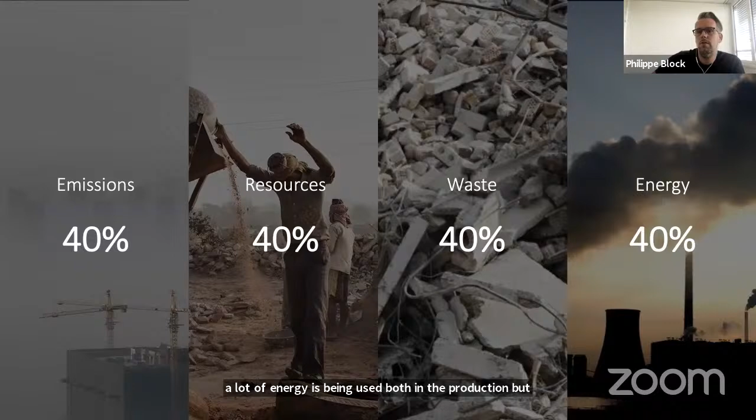Apologies if this is known to you and if I'm repeating myself, but if we were to build like we build today, in order to provide an average quality of living to the 20% more people expected on this planet in the next 20-30 years, this is what it translates to. The challenge ahead is we need to build the equivalent of one New York City every month for the next 40 years.

So we shouldn't do this as we do it now, because these gigantic global numbers still persist.

This framing was very similar in other lectures, but I want to emphasize that these are indeed the two aspects that I believe we need to fundamentally disrupt and find other solutions for. We need to design, we need to build differently.

As a half architect, half structural engineer, I would call myself a structural designer or an architectural designer—an architectural engineer, that is. I will be focusing mainly on the embodied emissions, so the ones related to production of materials, construction, and so on, and less on the operational energy.

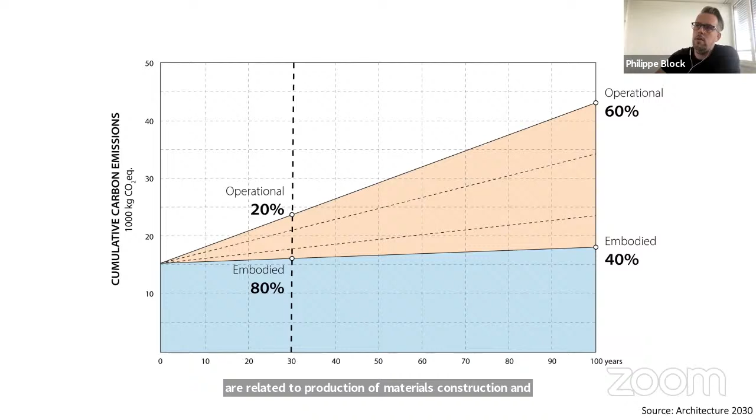But just a quick statement there. Theoretically, the world would have a very straightforward solution to reduce the operational energy and emissions very directly, by actually switching to renewable, greener sources of energy. But we don't have as straightforward a solution to the problematic embodied emissions.

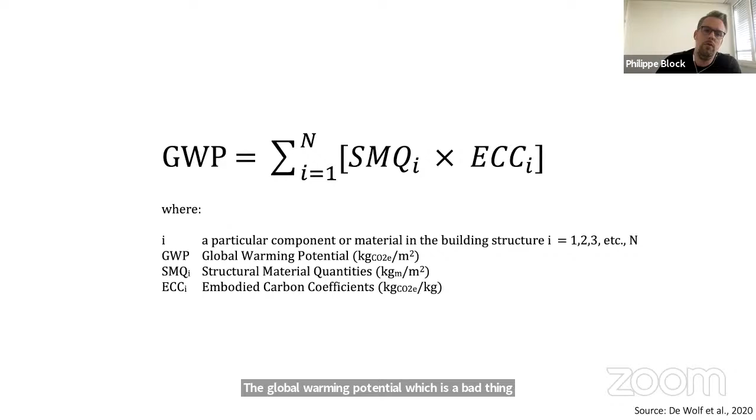I like to adopt or borrow this equation by Catherine De Wolf, which she developed for her PhD with John Ochsendorf at MIT, where she really reduces the complexity to what really matters: the global warming potential, which is a bad thing. It's basically the amount of pollution associated with a building or construction, which can be expressed as the sum of all the parts of this building.

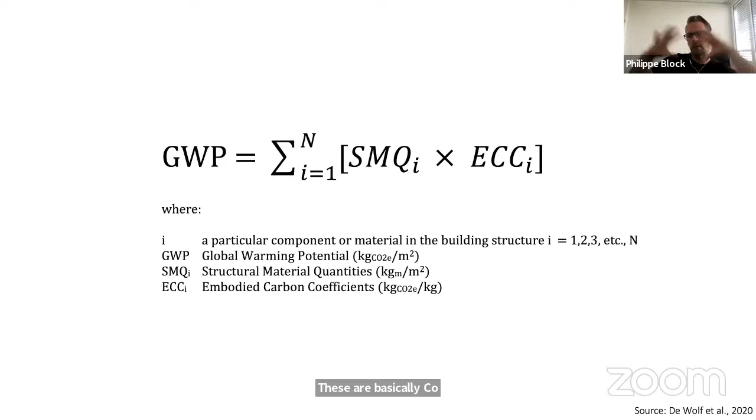And then there are two things that are important. What she calls the structural material quantities—basically the volume of material that one uses. And then the second is the ECC, the embodied carbon coefficient. These are basically coefficients that describe or capture the pollution associated with a material.

So you see in this equation that our target should be very simple. You can either make a structure very light, significantly reducing the volume, or you can use very low impact, low pollution materials. Ideally, of course, you achieve both.

An important point to make here is that in engineering history over the last decades, engineers have mainly focused on 'lighter is always better.' But this is not necessarily true, because if you make something lighter but in exchange use a highly polluting material—one with a high embodied carbon coefficient, like carbon fiber—you might be offsetting many of the benefits you're trying to achieve by going lighter.

So what I will show in this lecture is strength through geometry. I will also explicitly talk about material effectiveness—it's not just about efficiency in the traditional sense of using less material or being lighter, but more about how you use material. This is key.

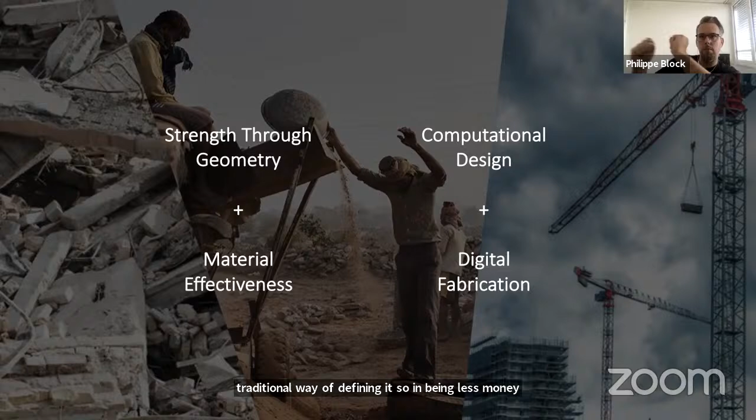And then, of course, as I already said at the beginning, we use computation both for design and fabrication to try to design and build differently.

Right now we're about 12 years into our adventure. I started my chair in August 2009, and we've tried not to remain just theoretical or stick to the design side, but also question how we build things. Increasingly, we're translating these ideas into real projects, which is a totally different kind of challenge, and I'll give some insights on this later.

Let's first look at computational fabrication. I purposely don't call it digital fabrication, because everything is digital—even a simple CNC mill is digital. I call it computational, meaning we don't just do things digitally, but in the design process we already encode fabrication logics, principles, and opportunities, but also limitations, so that you can really capitalize on those advantages.

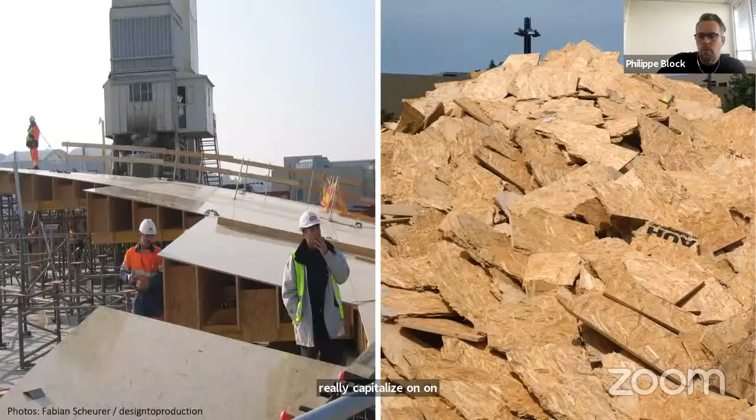An important strand of research for us in recent years has been addressing the shaping of structural geometries—these shells, which are non-standard geometries—and trying to address the huge waste, cost, and logistical challenges associated with realizing such structural geometry.

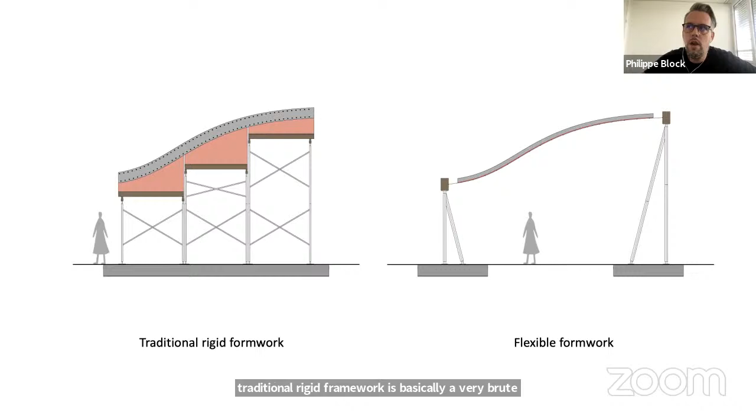In a way, what you see on the left, the traditional rigid formwork, is basically a very brute force approach. While if you introduce flexible formworks, you can go very light, but that also means, relating to my comment about computational fabrication, that you need to take the restraints, the equilibrium, and the structural logic of these flexible formworks into your design framework.

So a prototype of these kind of ideas we built, I don't remember, in 2017, 2018. Sorry that I'm blanking on this now for the moment. But this is, of course, the work of Mariana Popescu.

Here you see basically that if you get the geometry of your formwork right, so if you actually use structural geometry for your formwork itself, you can use literally something as simple as a stiffened sweater to build, for example, a concrete shell.

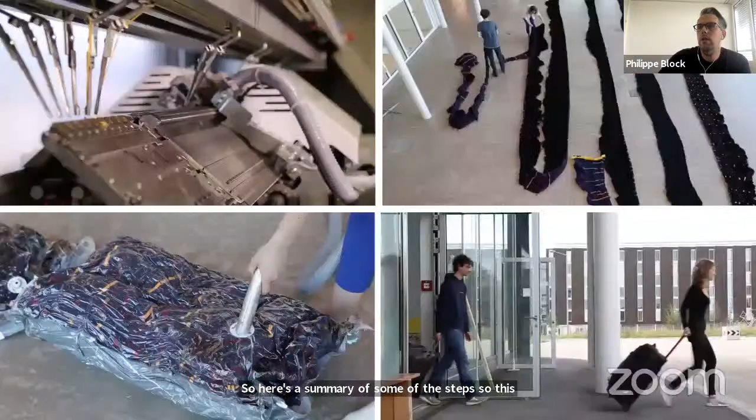So here a summary of some of the steps. This is using 3D knitting that is super lightweight, easily shipped in just 2 suitcases in this case. And then with these technical textiles, these 3D knits, you can also create all kinds of pockets and include other kinds of features and so on.

A key message here is that we develop these systems also thinking about what happens on site. So for example, this 2-layer fabric has all the clues, all the connectivities, all the slots, all the components included, in order to be able, even with workers we didn't meet before, to realize this complex geometry very smoothly and easily.

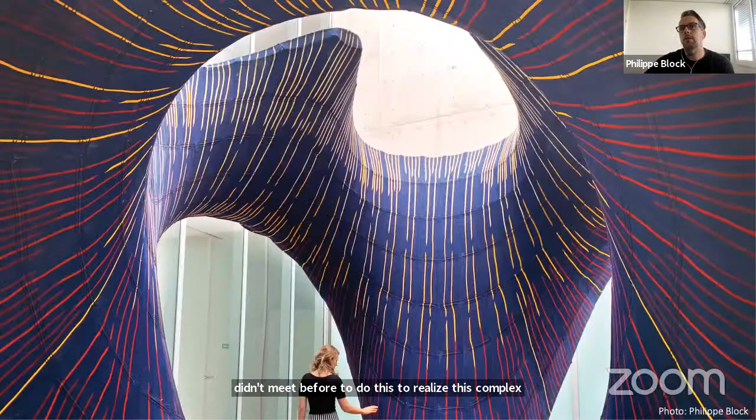In this specific project called Knit Candela, we also wanted to express another materiality. So the inside of the shell, the fabric formwork, was left in place to have this kind of unique aesthetic. But why we did this project was that behind this colorful interior layer, there was actually quite a sophisticated lightweight shell with stiffness in 2 directions.

A sophisticated shape that could be easily realized by this double layered knit where little balloons were inserted in order to create these pockets at the end of the structure.

Most important for me, though, is increasingly to always be very clear why we do demonstrators, what we want to achieve in our prototypes, and exactly also then to try to check with the actual numbers and statistics if we achieved what we were trying to set out.

So that is why this slide to me is maybe most important, to really double check if we achieved what we set out. What we tried to achieve here was to do this in a very tight schedule, only 3.5 months from first invitation to realization. Of course, in a Mexican context this is extremely slow, but nonetheless, I have the feeling that we achieved quite a bit, because this 3.5 months included design, many engineering iterations, and developing, prototyping the formwork system almost from scratch.

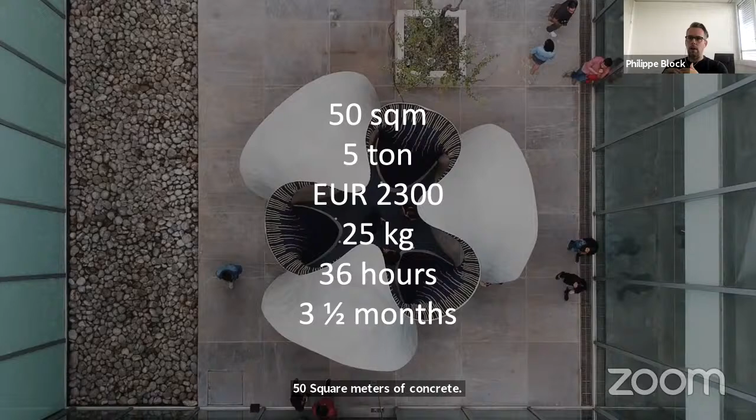So this is what we wanted to challenge ourselves with: can we indeed live up to the promise of having, for a sophisticated structure, a simple way of going on site and reducing the waste associated with these non-standard formworks. We're lucky that, and this is a project that has been going on for much longer, we can also translate these ideas not just into prototypes, but also into real buildings.

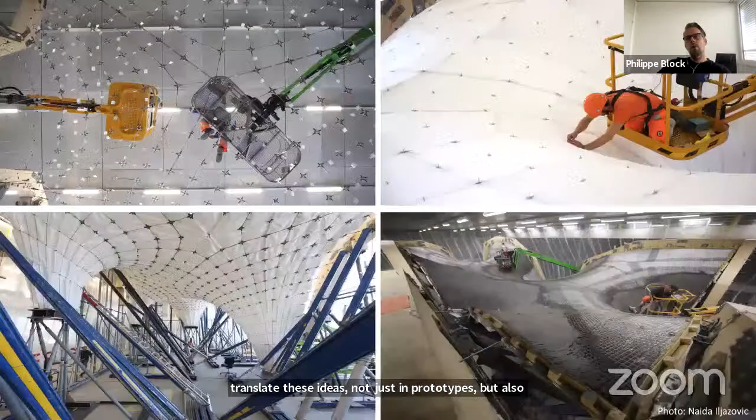This was still the prototype for this, where we indeed use a similar idea of a lightweight cable net formwork with a woven textile kind of draped over it.

In this case, what's perhaps interesting to point out is that the system we developed with these cable links could be entirely taken apart and reused. Indeed, 85% of all these components were reused in the final project, even though the shell received quite a lot of updates compared to this prototype.

This prototype in 2017 was extremely important in the sense that we learned a lot, but more importantly, every single step was done with the industry partners that would realize the real project. This was key because it allowed us to together figure out what the real bottlenecks were.

And also to build up confidence to translate such an extreme innovation, a tension flexible formwork, at quite a large scale. So what you're looking at here is roughly 20 meters by 10 meters by 7.5 meters in height.

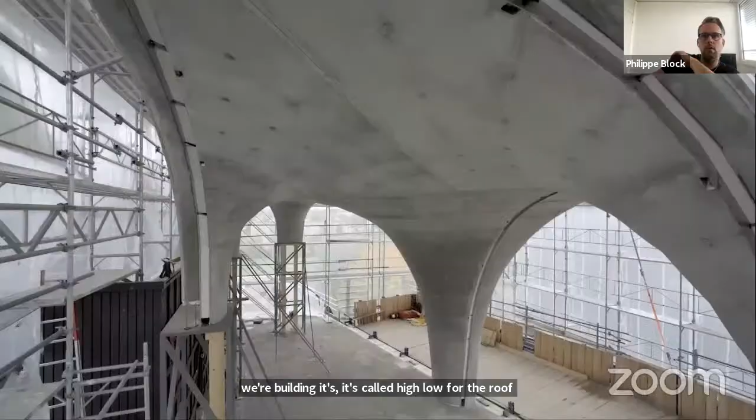So this is a large surface that is being built on this flexible formwork, for a unit on a building we're building called Hilo. For the roof, this now finally got built. So here you see a little video with some hints of the final double layer shell being built.

This was after decentering. So here you see a slightly reconfigured kind of formwork that could be easily put together and assembled on site with all the connectors and also elements to measure the geometry so that it's exactly where it needs to be.

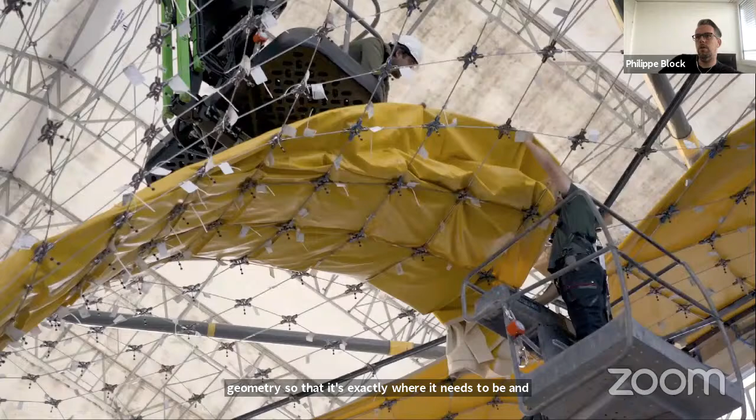So here you see our team, the BRG, who are not just computational experts, but also fabrication contractors or formwork contractors, it seems.

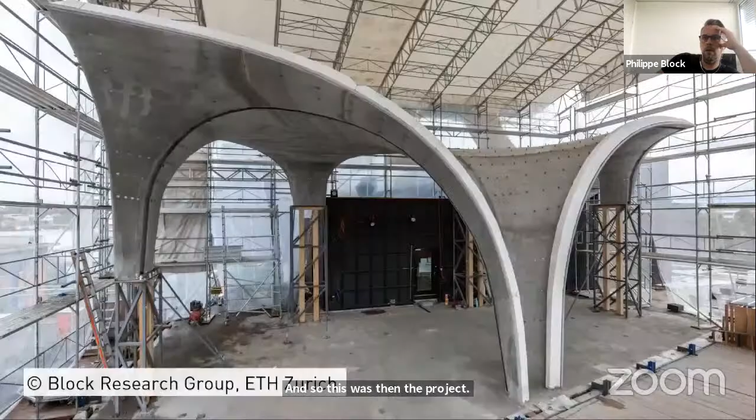It's a 2-layer shell. It actually has 2 very thin layers of just a few centimeters that are connected with stiffeners in between the insulation blocks. And so this was then the project as built for the Hilo unit.

This is on the Nest building, and I show you some more recent pictures just to show all this unevenness. These pictures were taken directly after decentering, so you see that now, a few months later, these uneven spots really blend out, and that this linear surface is really starting to look very unique and clean.

Of course, then also, it's not just about the shell, it's a real project. So here the different rooms have been installed. These are very simple prefabricated timber boxes.

So the project is finally opening, by the way, in October. Look out for the press release and the launch on October 6th, I believe, or October 8th. The unit will be inaugurated.

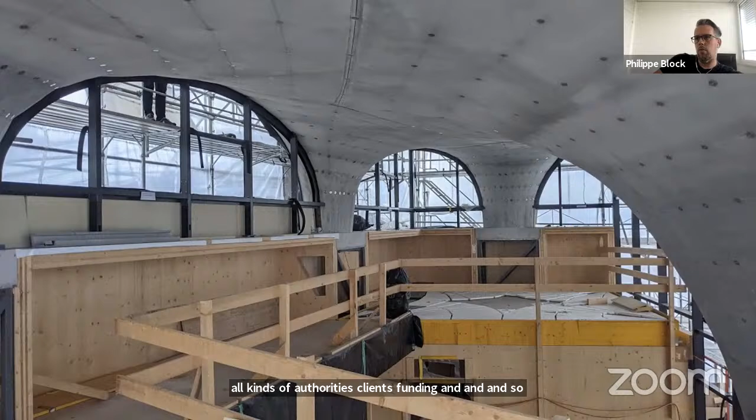It is really a project indeed. So here you see the facade elements coming in. It's exciting for us to see that this project, which started, can you believe it, in 2011, that we have been working on and trying to convince all kinds of authorities, clients, funding — it will be quite a celebration that after almost 10 years, this project will be realized and inaugurated this year.

Maybe for us, the biggest achievement in this project is that the roof was developed extremely consistently through this open source computational framework called COMPAS. It's a Python-based framework for collaboration and exchange, mainly in research, but we see this as a very valuable kind of model to start to have a much more integrated design to engineering, to fabrication, to all the way to construction.

And even if you plan for it, for demolition and deconstruction at the end. So we use COMPAS as a hub between all these different partners, some of them with absolutely no computational background. It allowed us to have a clean, trustworthy, central hub that generated all the information, but that also allowed us to integrate very new research ideas in a real project with real expectations, budgets, timelines, and so on.

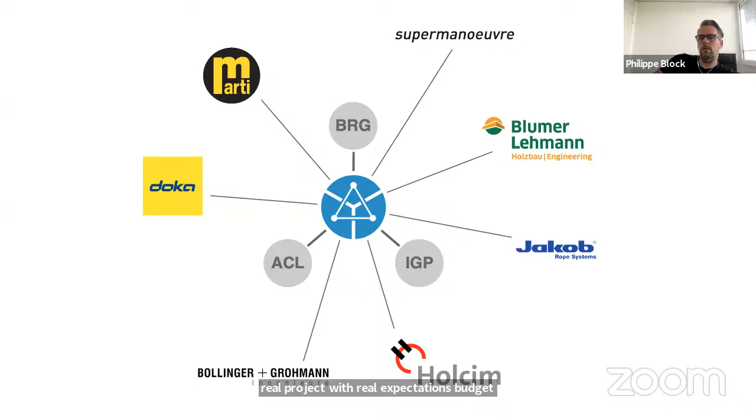So in a way, this allowed us to try a different kind of more integrated project delivery model where we have a central computational hub. And from that, all the different information is generated without any data loss, something that would not be possible with a typical BIM approach, because it's all generated from the same lightweight data structures and geometrical models.

Okay, so a key message for us that I want to share is, of course, strength through geometry. This has to do with structural geometry, particularly with reintroducing these elegant structural forms from the past.

More specifically, and you will understand—I will explain all the layers why we're reintroducing compression-only geometries like these beautiful vaulted shells.

In fact, the most active and largest part of our research group is our subgroup on masonry structures. This is also what I did my PhD on at MIT. I developed methods to assess the stability and safety of historic structures. That is something we are now going back to, because it's a big challenge to treat our architectural heritage in a respectful way.

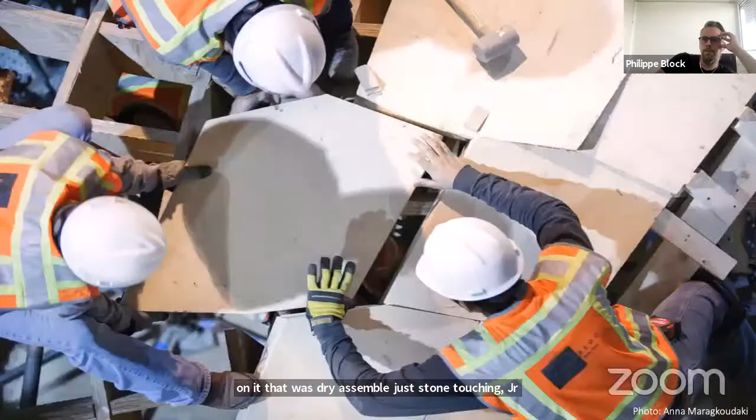Strength through geometry is not just about fancy shapes. This project in South Africa that I was lucky to be part of in 2008 really clarifies why I insist that we should reintroduce these funicular geometries.

It has to do with the ability of compression vaults, shells, and arches to not only significantly reduce the amount of volume you need, but also the stresses in the material are very low. So for those without an engineering background, this means the strength the material needs to provide can be extremely low.

And that means the pollution of a material is almost one-to-one proportional to its strength. So ultra high performance concrete is much, much more polluting than low strength concrete, which is much more polluting than soil concrete, which is much more polluting than pressed soil tiles, and so on.

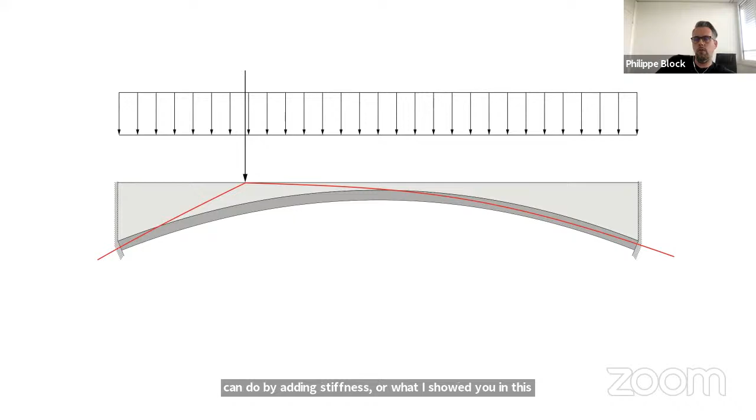These arches are good for certain loading cases, but you need to find ways to stiffen them to handle live load cases. You can do this by adding stiffeners, or as I showed with the armadillo vault in Venice, by using positive double curvature. But you don't always have the structural depth to achieve double curvature, so adding stiffeners is also a very effective way.

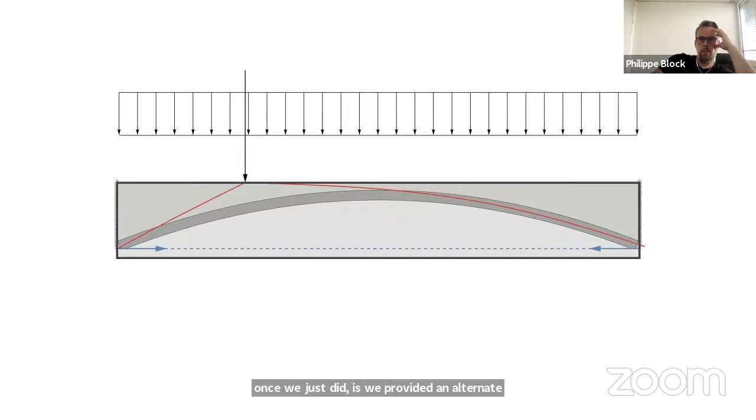By adding a tension tie, what we provided is an alternative for a beam or floor plate that is 70% lighter. I'm not talking about crazy computational strategies—I'm talking about reintroducing structural principles that have been abandoned 50, maximum 100 years ago. What a pity that we no longer use these arches. The missed opportunity is all of this material saving that we get for free.

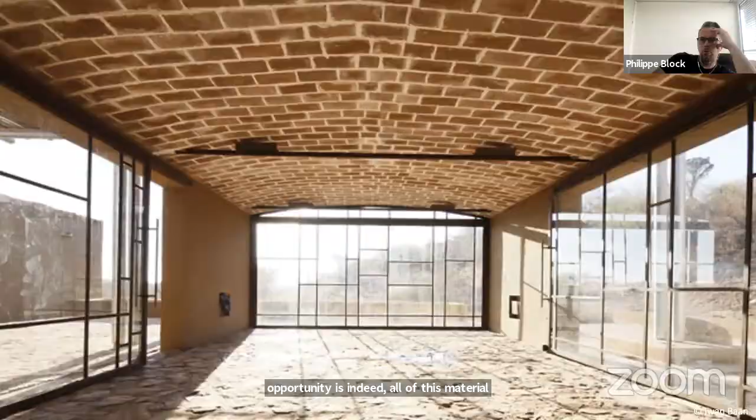Initially we did this to address problematic situations with so-called low-cost housing. By mimicking how we built elsewhere, this was really not an appropriate model for an African context.

Let's now shift to material effectiveness. In our context we need to build a lot of these floors. If you look at a medium high-rise of 10 stories or higher, you'll see that three-quarters of the weight of that building is actually in the structure.

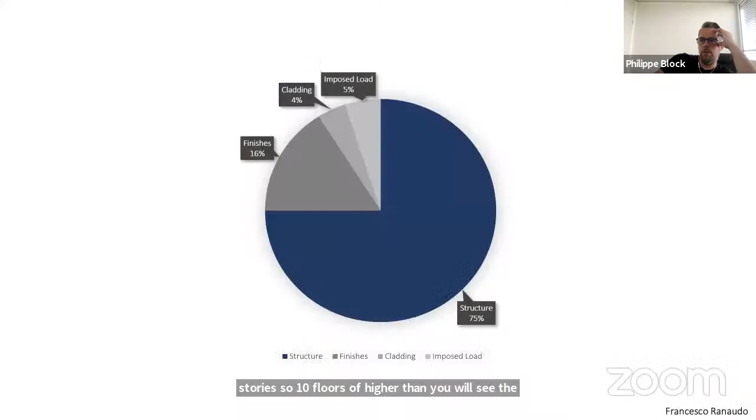Sorry if this sounds like repetition, but please remember it forever: three-quarters of the weight of a building is there to keep itself up more than anything else. And when you zoom in more, you see that more than half of that weight is in spanning space—basically in the floors.

Most of these floors are in reinforced concrete, so that is a lot of material, that is a lot of pollution. That is really one of these key bottlenecks that we should disrupt. Globally in the next 30 to 40 years, another translation of this one New York City per month to be built is that we will need about 230 billion square meters of floor area more on this planet. So that is how many square meters of floor need to be built.

Considering that of all these projects, 40% of the material used is basically in the floors, can we do this better? So this is one of these key polluters that we need to do better.

I already talked about this, that concrete is labeled as this most destructive material on Earth. That is absolutely correct, but it is also related to how we use concrete. And I will make it very clear that reinforced concrete—plates, beams, and so on—is absolutely not how this material wants to be used. And there's some very good hints for this.

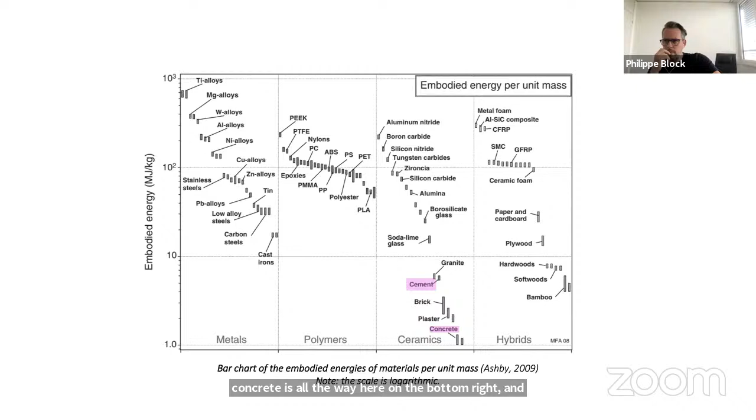But you see that concrete is all the way here on the bottom. This is a bit curious. So why is it then that concrete is so polluting? It's maybe not about energy, as I said in the beginning, but maybe more about emissions. And there you see something similar happening.

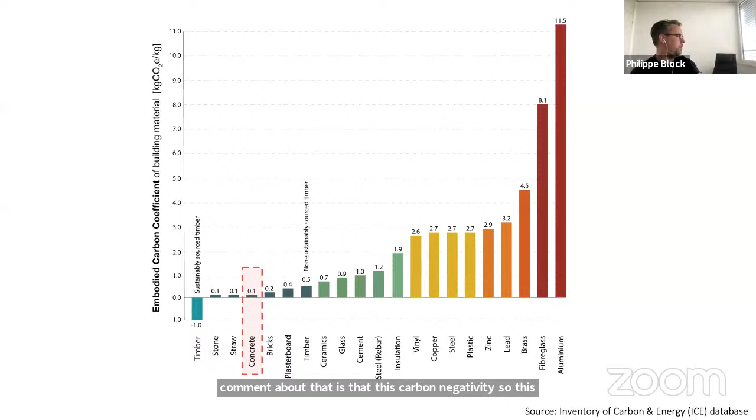Of course, the only material that we cannot beat is sustainably sourced timber. But I want to make one comment about that: this carbon negativity, this locking in carbon—the rationale is that trees are basically absorbing carbon throughout their lifetime. What's really important there is the end of life scenario of these timbers, because if they rot or are burned at the end of their lifetime, then all this carbon is released into the atmosphere again, and you don't have any of these negative benefits.

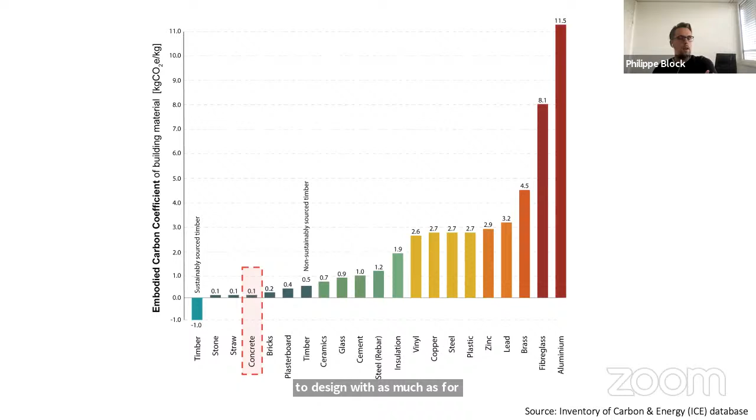Another comment to make—and this is not a statement against timber—timber is an amazing material that we need to design with as much as possible, but how much sustainable sourcing can we do? Because the challenge is gigantic. And that is why, if you take anything away from my lecture today, I would want our discipline to be less black and white—less this is good and this is bad, this is green and this is not green. We need so many solutions, and it's not black and white, because how we are using concrete is probably one of the many solutions that we need.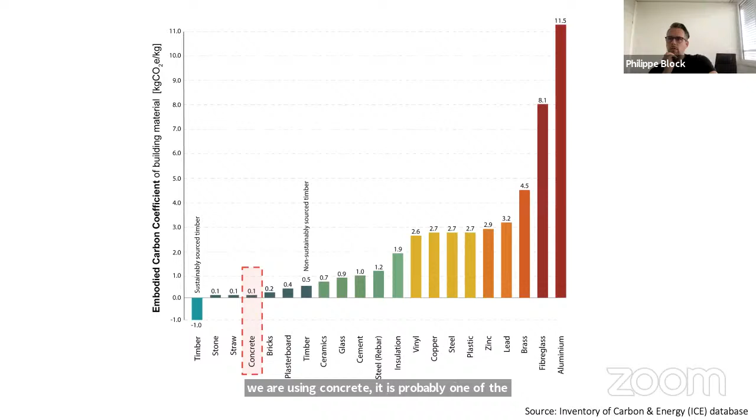So, sorry, I'm digressing a little bit here, but my message is that concrete seems to be not that bad at all. What is then the hint is that we should maybe use concrete how it wants to be used. Concrete can be seen as an artificial hybrid kind of stone, so let's use it how a stone wants to be used—in compression, as a vault, as an arch.

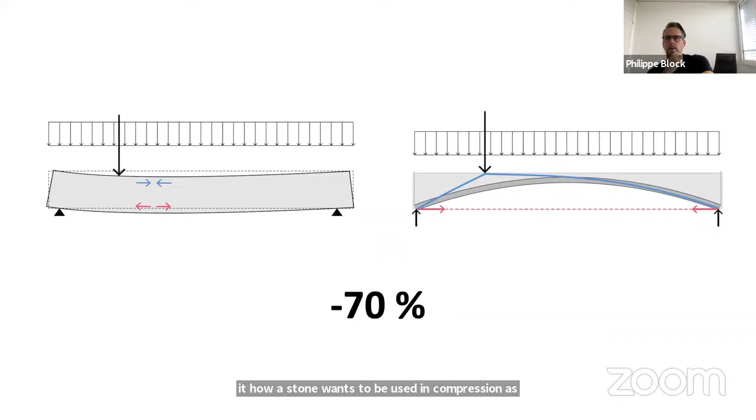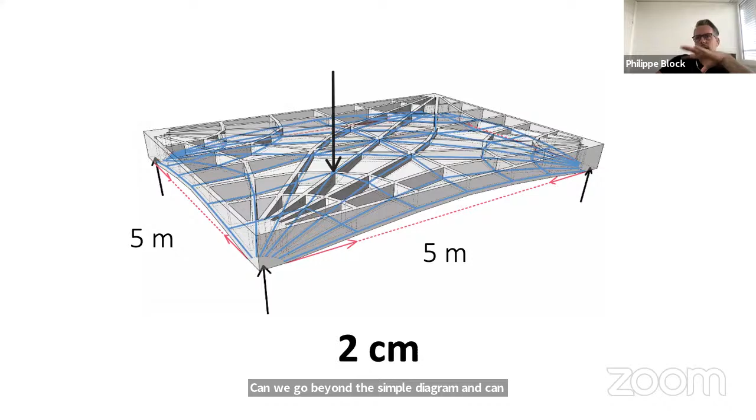And indeed, we already looked at this compared to the reinforced concrete beam, which is actually flawed from the beginning, because in order to activate the reinforcement, the concrete needs to crack, which means water can infiltrate, which means the structure will have to be replaced after 40, 50 years if it's outside. So by reintroducing the stiffened tied arch, we just get already for free this 70%. That is where we started to then see—can we go beyond this simple diagram, and can we start to really also produce three-dimensional floor plates that have these properties?

These are some of the early prototypes where you see the shell. The shell is basically to take the self-weight of the construction, while the stiffeners are there to take the live loads to the corners.

Very early on, we tried to also immediately address bespokeness and the fabrication challenges. So this is a sand 3D printed floor, very weak material, but we demonstrate that these floors with equally weak properties as the materials I've shown in South Africa can take actually all required building codes. Here, of course, we are crushing it to failure to really understand the ultimate capacity of the structural elements.

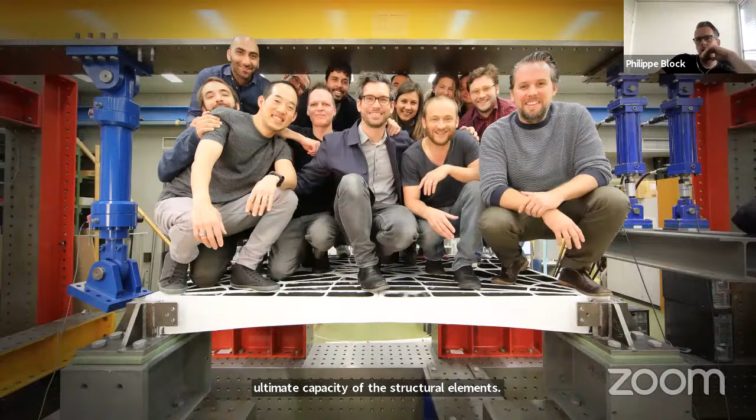And this is, everyone loves this kind of load test. This is 1.2 tons of ETH nerds. This was half of our group at the time, standing on this very thin 2 centimeter unreinforced shell.

So just to clarify again, why are we doing this? With the backdrop of 40% of all these kind of medium high rises being built in all these growing urban centers throughout the world, we now have a solution that uses 1/3 of the volume of concrete, only 1/10 of steel compared to the reinforcement in typical floor slabs. This translates to a fraction of the embodied carbon associated to these floors.

We also are developing those as dry assembled prefab, which is a very important aspect to capitalize or to be able to make this system feasible, challenging the status quo. We are really pushing for prefab so that we can have fast, precise erection on site.

Because the stresses are so low in the material, we are actually allowed to use other materials, low strength materials, a lot of recycled content. And because we separate compression and tension, these elements, if not reused, can be very easily recycled because there is no pollution of materials, no embedding of reinforcement and so on.

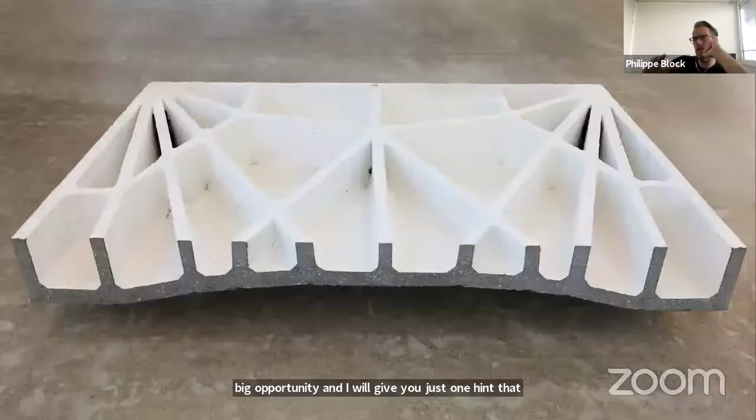So this discreteness is a big opportunity, and I'll give you one hint that this is really starting now to be implemented. Also these cavities, by the way, all the stiffeners, we just need the structural depth, but we can start to embed building systems so they don't have to be solid. This is a huge opportunity because where structure used to be, we can now have very efficient building systems integration.

As I already mentioned, but just to clarify what I was talking about, is that we don't have a structure that is very expensive and energy intensive to actually take apart. And here in these kind of things, it's just immediately given up to do recycling. So we don't have this because of clean separation.

Maybe some of you were thinking that these floor plates look like Pier Luigi Nervi's floor plates. Of course, everything we do is inspired by the past, but I want to emphasize a very big difference: what you're looking at here is that these are still beams that are aligned very efficiently. This is fundamentally different than what I have been talking about.

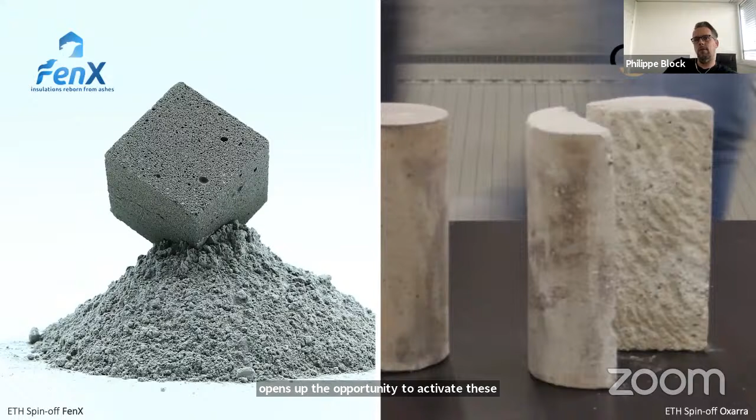So if you don't have a stiff funicular shell in compression and you still use beam action, then because of this bending moment, you still have stress concentrations, meaning you still need to use high strength, hence higher polluting materials. And so what we are showing with these extremely low stresses in the material, that opens up the opportunity to activate these new types of materials made from industrial waste on the left, or excavation soil on the right.

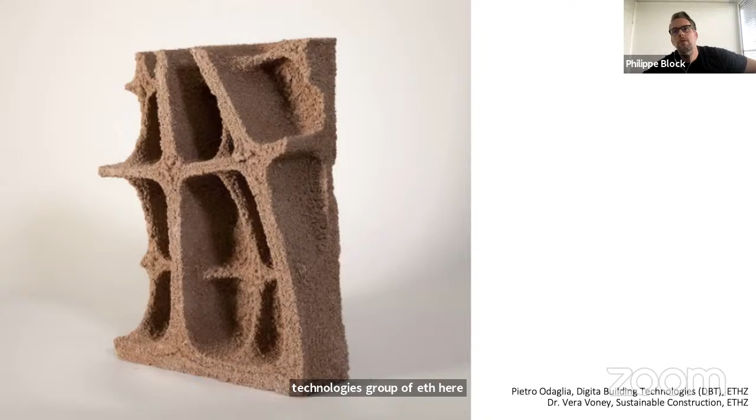An example for that is my colleague Benjamin Dillenburger at DBT, the Digital Building Technologies group at ETH. He's now really developing binder jet prints that allow very precise structural components to be printed, for example, from 100% demolition waste.

Okay, so I already talked about this unit HiLo. What's neat is that the very first real scale, because we're talking about more than 5 by 5 meters, unreinforced funicular floor has been built here in this unit. So here you see roughly the dimensions. For this, we made this formwork.

This was our team that assembled this again, our team, the formwork experts. In this case, and this is maybe an interesting detail, in order to make sure that the shell is activated from the beginning, we have some post-tensioning along the edges. So the tension ties are post-tensioning.

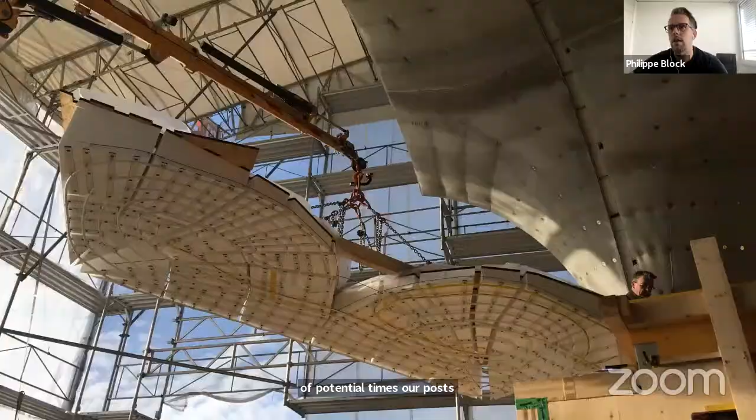And in this case also, you see that we have this integrated hydronics, which personally I think is not a good idea, but this was a collaboration, so we had to accept these kinds of additions by our partners. Why I mentioned this is not a good idea, in my opinion, is for the important target of actually keeping materials separate, so that they can be cleanly taken apart, that we can use them after the end of life, that we have easy strategies for recycling and so on.

So here you see some of the pumping. Very thin shell, just 3 centimeters of structural concrete, then 2 centimeters additional for embedding the pipes, and the stiffeners are only 2 centimeters.

This here you see after casting, we kept the foam blocks as stay-in-place elements to add insulation and make sure that the pipes radiate in the right direction and so on.

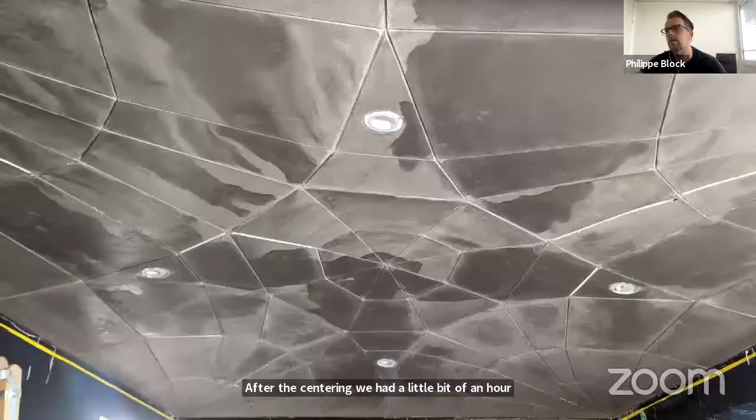After decentering, we had a little bit of an unpleasant surprise that there was not a perfect mixing of all the chemicals. So now we have to find a way to deal with this.

So beautiful, super clean. You don't see it in this picture because it's not a good quality picture, but the finish could have been perfect. You can imagine how frustrated we are that the concrete experts managed to not mix the mix properly. This is very frustrating, but we'll deal with it anyways.

Okay, but so this all still is a bit of prototypes. I'll try to now sketch what this really could have as a global impact. For this, we prepared this case study of one of these very common traditional medium-high rises, let's say 25 stories high, and we did the numbers.

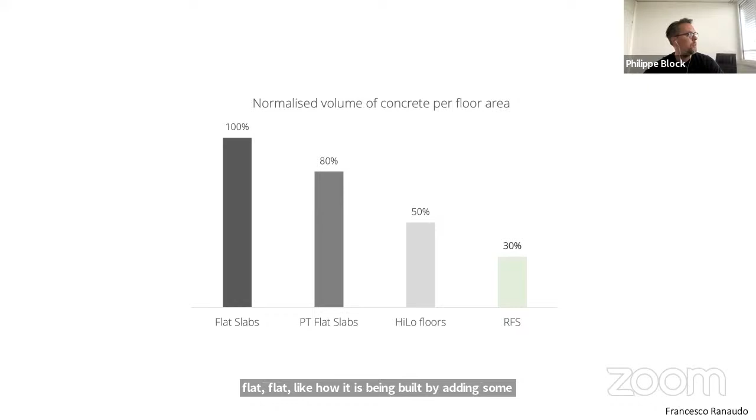On the left, you will always have the reference, which will be the flat slab, like how it is being built. By adding some post-tensioning, you can do significantly better, for example using hollow cores and things like that. The high-low floors is also in there as a reference because this is a really built project.

So you see that in the high-low floors, we have half of the volume. This was, of course, because we had to make all kinds of compromises compared to what we know could structurally work, because it was the very first time that such an unreinforced vaulted system was built.

And then you see the outlet, the RFS. RFS stands for Rippmann Floor System. So we have decided, and our partners have agreed to this, we are now commercializing these floor plates.

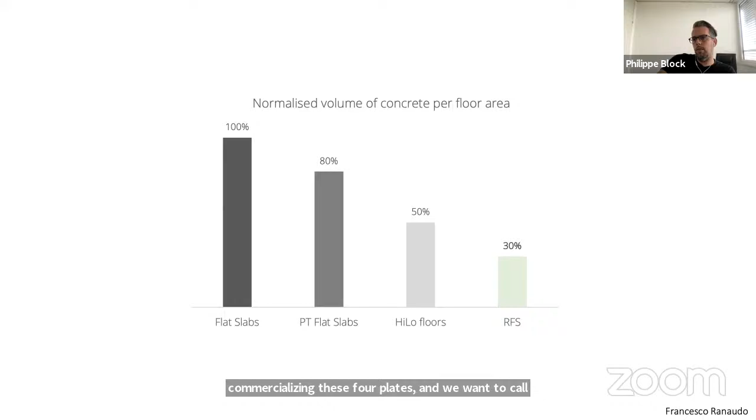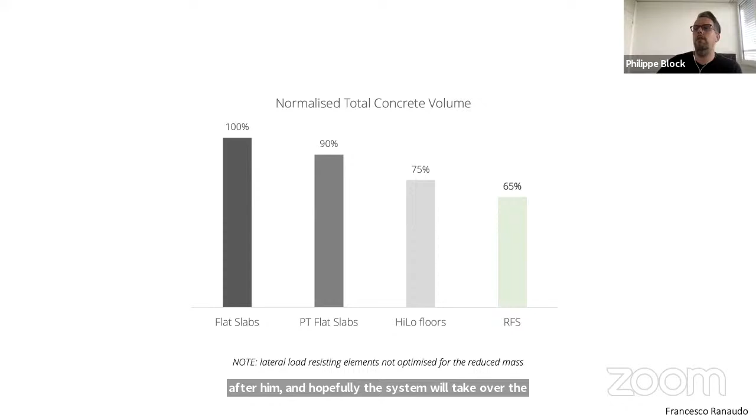We want to call them after our late friend and colleague Matthias Rippmann, because the beautiful 3D printed models that you saw earlier were actually one of the last projects that he really worked on. So we found it appropriate to call this system after him. Hopefully this system will take over the world and be used for all construction. This would be a nice homage to our late friend indeed.

But as I said, the floors is one thing. On the global level of the building, this would translate to needing only 65%. But now when you translate what that means for just one of these buildings, you remember the background image of all these buildings, this would translate in 7,500 cubic meters of concrete less.

Which, if you translate this into concrete trucks, would mean that you would need 1,200 concrete trucks less that need to go to this building site. This to me is absolutely mind-blowing. And we're talking just about one building, right? So focusing on this one banal element that we all need, the floor, this could be the impact.

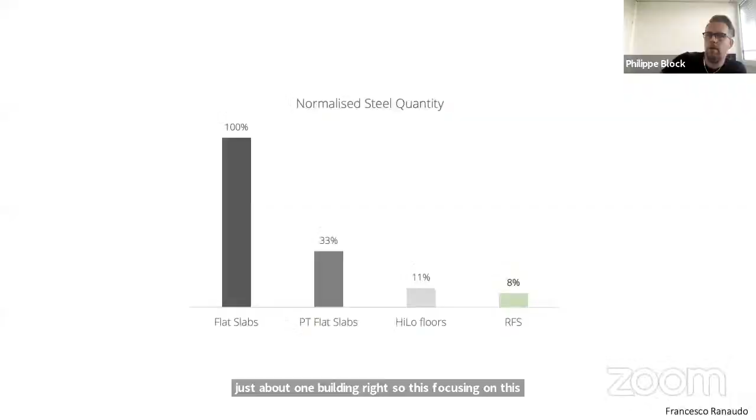But maybe the impact becomes bigger when you actually look at the amount of steel. And you again look at the high-low floor as reference. We need only 1/10 of the amount of steel, which would translate for this one building to 20 kilometers of 12 millimeter steel bars per floor. Or if you lay it out, all these reinforcements would take you from Zürich, where I live and work, to Brussels, where I'm from.

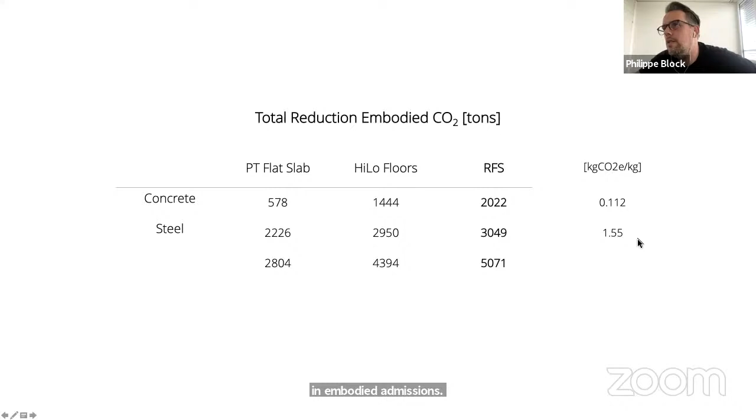But what really matters is actually not those volumes and so on, those are some nice statistics, but is indeed to start to translate this into the reductions in embodied emissions. What's maybe important here is, on the right, you see this relation, and this is again per unit mass, of the first value is the ECC, so the embodied carbon coefficient of concrete, versus recycled, so 100% recycled reinforcement steel, right? So if we would be using virgin steel, then you can triple or quadruple this value even more, right?

So this is, but you see the big difference between the impact of concrete versus the impact of reinforcement steel. This also means that to achieve this gigantic reduction per square meter, for this large volume reduction of concrete, we only attribute 40% towards that, while actually taking out the steel is maybe most important.

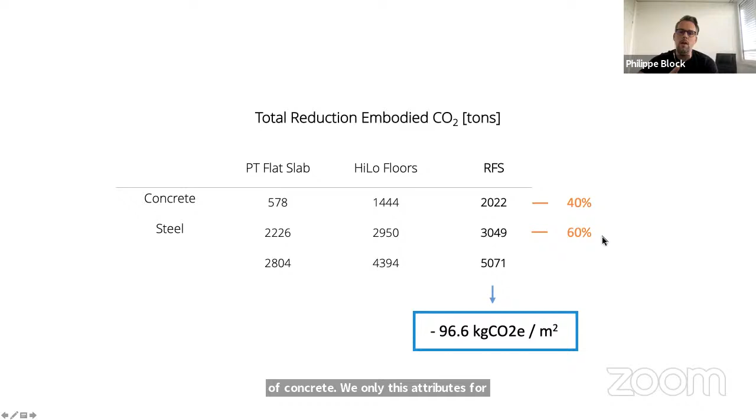So again, this relates to material effectiveness, right? You want to use materials how they want to be used, and place them where they're most effective. So steel only as tension ties and concrete only as a vault or as a shell.

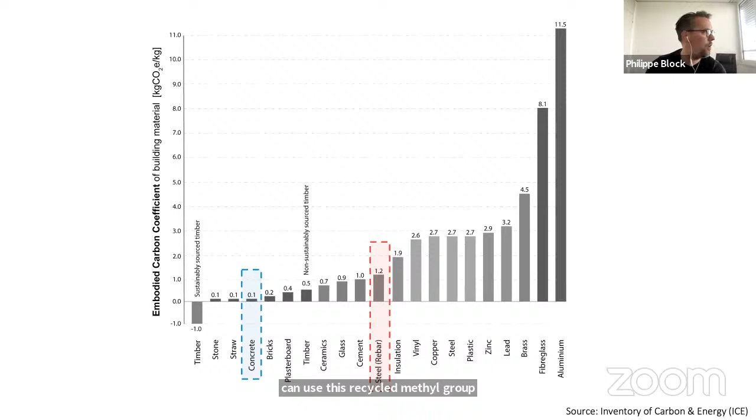Maybe an interesting anecdote is that almost all scrap metal in the world is being recycled to become reinforcement steel. So if we take out most of the reinforcement in all these floor plates, then we can use this recycled metal for functions, elements, components where it really matters, like for long span structures, and we would not need to go to virgin materials for these kind of components. So there could be a lot of side effects to this as well.

And I'm very proud that we got a very big partner, Holcim, to team up with us to now commercialize this to a real system. We're also pushing - so if you have ideas or real projects where you think this could be implemented, let me know, contact me. We're very keen to collaborate.

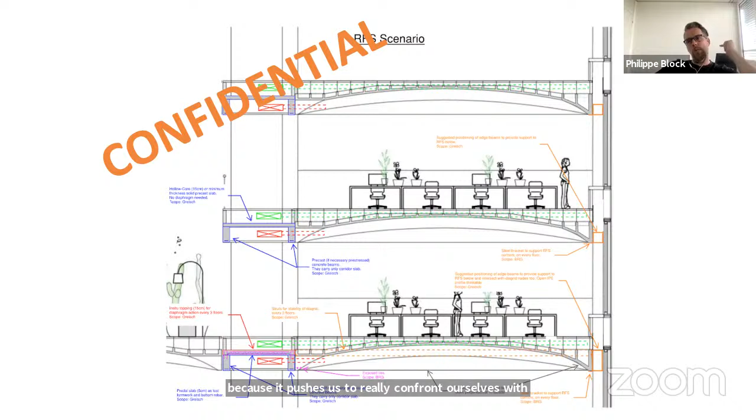I'll show you very quickly a real project that is now being submitted for building permit, where these floors for spans of 10 meters are being used in a real hybrid building - hybrid office living, with also new ideas of super efficient building systems integration. This is a super cool project because it pushes us to really confront ourselves with all the constraints of fire safety, acoustical performance, assembly logic, cost of shipping, and so you will see this appear very soon indeed.

But then what to do with all this biomass, this waste, rather than just burning it? There is a research group under the lead of Stephen Lamb at the Department of Environmental Affairs that basically developed a concrete - a super lightweight concrete, a blast-proof concrete, a fire-safe concrete - that uses, instead of sand and gravel, shredded bio-waste, these non-indigenous toxic plants in the context of Africa, as aggregates for the concrete. So they have been developing this.

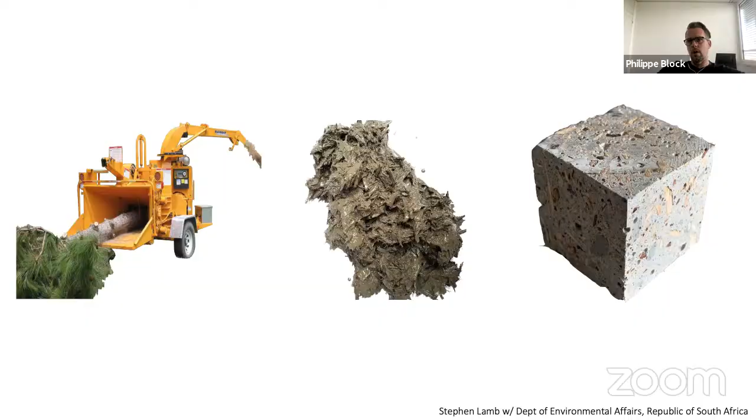I'll skip this quickly. But what we are now doing is that they approached us for two ways: by getting the geometry right, they can reduce the amount of cement, and by getting the geometry right, they can reduce the amount of reinforcement steel. Both of those components are highly polluting, but more importantly, because they're developing solutions for dignified housing for the lowest income people, what's important there is that this also allows significant reduction of the cost of these constructions.

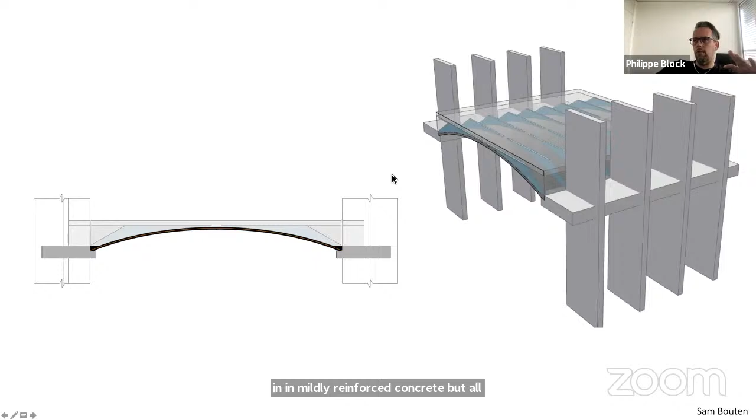And we want to try to get all the steel out, or almost all the steel out, and we do this by reintroducing really these Gothic or even Roman ideas of adding buttress walls. So this is the structural principle. We do have one very efficient deep transfer wall in mildly reinforced concrete, but all the rest of the structure is unreinforced - we have a very efficient stiffened funicular plate. Then we have all these unreinforced buttresses that are used for architectural reasons as well. So we're developing with them, with also the Department of Housing, how we can translate these ideas.

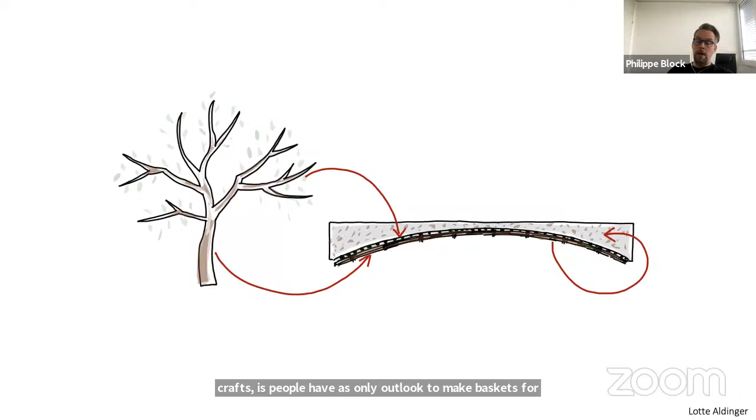What's nice is that for the formwork of these systems, we work with local basket weavers, so local crafts. These people have as only outlook to make baskets mainly for tourists. Now these local craftspeople are activated to make high quality, very unique formworks for these structures.

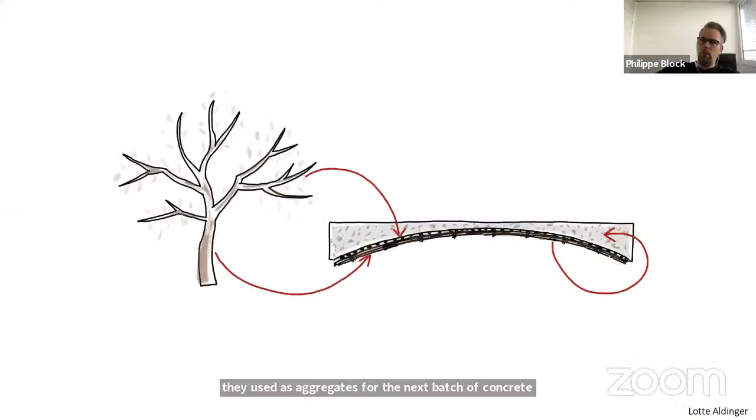What's pretty neat is that they weave these formworks using these same non-indigenous plants and bushes. So after use of the formwork, after a few times—you can use these mats a few times—they're just shredded and used as aggregates for the next batch of concrete. So it's a full circular, no waste production process.

And then, of course, we're celebrating and expanding the opportunities of playing with these beautiful imprints of the materials, much like the beautiful imprints of bamboo in Philip Yuan's project, to really celebrate how this is made with local crafts and local materials.

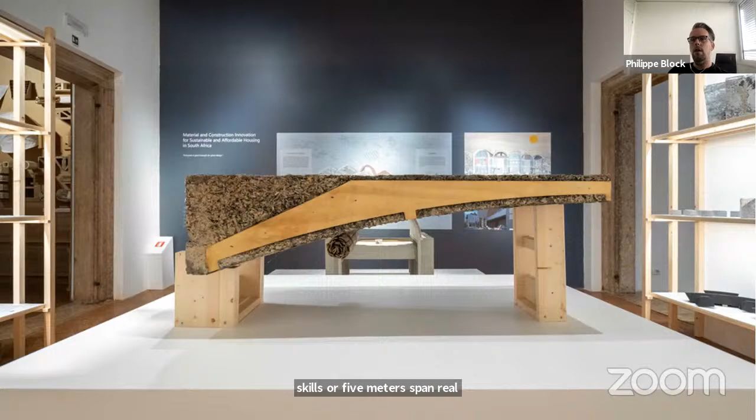If you have the chance to go to Venice, please go to Palazzo Mora, where we are showing this project and many of the prototypes we've built. For example, now we're building a full scale 5-meter span real structure. But here you see some initial prototypes where we make these very thin, stiffened floors out of this very unique waste-absorbing lightweight concrete.

But maybe what's even cooler about this project is the smart brick—a brick that could be cast very simply with the same material, an unreinforced brick. And this brick...

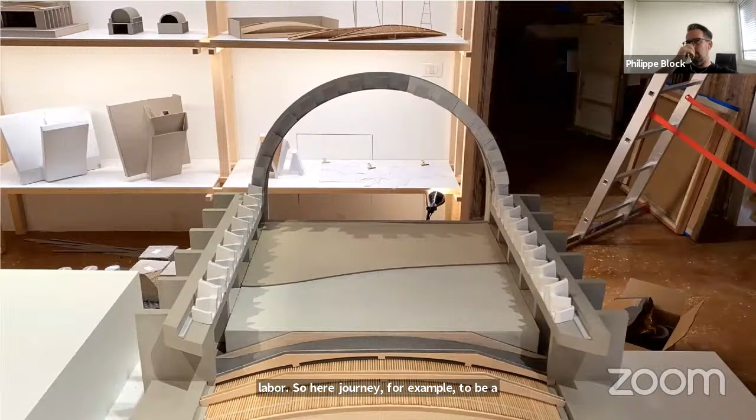...is stable during construction, and it allows any unskilled labor—here Juni, for example—to assemble it without the need of formwork. So it's geometrically interlocking. It's optimized not to create too much bending capacity.

So it basically uses a little bit of cantilever during construction until you build an arch, and then that arch is stable, so you can progress in very safe ways. These bricks are now optimized to be repeated with very simple molds.

So these bricks that I showed you earlier, by the way, were built in South Africa with very simple molds that are made from developable surfaces and so on.

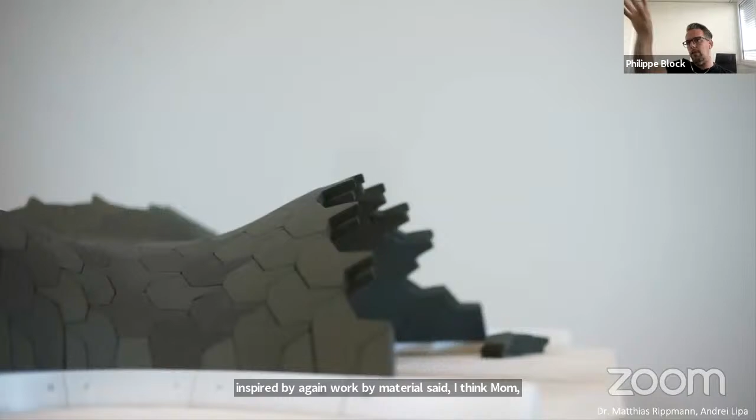This project, or this brick, is of course inspired by work by Matthias Rippmann, where he made these nice bricks that had this little piece sticking out so that they serve as support for the next row being assembled. So we want to continue this research in building in stable sections, to try to take most of the formwork out as well.

So Philippe already introduced in the beginning of the presentation that we're building something special in Venice. More specifically, what we're doing is building masonry, but using 3D printing—concrete 3D printing, to be more specific.

So here I'll share a few things and give you some hints. Unfortunately, I cannot disclose the entire project because it will be launched on July 19th, but I'll give you sufficient hints to clarify why we're doing this project there.

One of the fundamental approaches we use—this is of course the research of Shajay Bhooshan, head of the Zaha Hadid CODE group, but also a PhD student in our research group—is that we look at concrete 3D printing, unreinforced concrete, basically as the analogy to unreinforced masonry.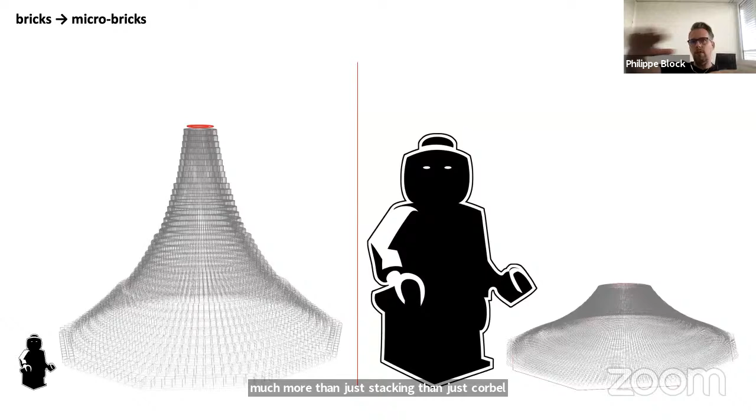So in a way, you could look at this as scaling up the problem. But of course, in masonry you can do much more than just stacking, just corbelling, just printing horizontal layers. So we also want to show that through non-uniform, non-parallel layers, we can activate arch action in these 3D printed layers and keep them nicely stable so that you don't have delamination issues.

In order to achieve this, Shajay has been developing an approach that allows us to focus on what we think matters: the control of the non-uniform print paths. So basically what we do is model our geometries such that the print path, its stability, and its alignment to the force flow is what we explicitly encode.

That means the geometry is implicit. This is fundamentally different from how 3D printing is typically done, where geometry is modeled explicitly, then a slicer generates print paths, and then this is printed. So we do it the other way around.

We actually use these morphing fields, these distance maps, to basically do that. So what's also important is, in order to not...

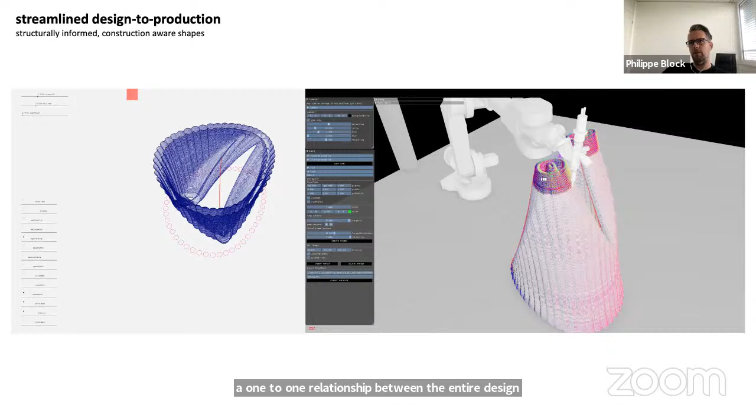Have to try and analyze and so on, Shajay has been focusing on a one-to-one relation between the entire design pipeline and then also the manufacturer, so that all challenges can be caught from the beginning. More specifically, he's using these contour maps to encode all of these elements. So there's two things: the synthesis of the task graph, but also the stability of the task graph.

Using functional representation, or as I emphasized, implicit modeling, this allows us to basically make sure that you don't have overlaps that are not sufficient, that you can align to certain kind of prime axis and so on, but that you can also print sophisticated pieces like this.

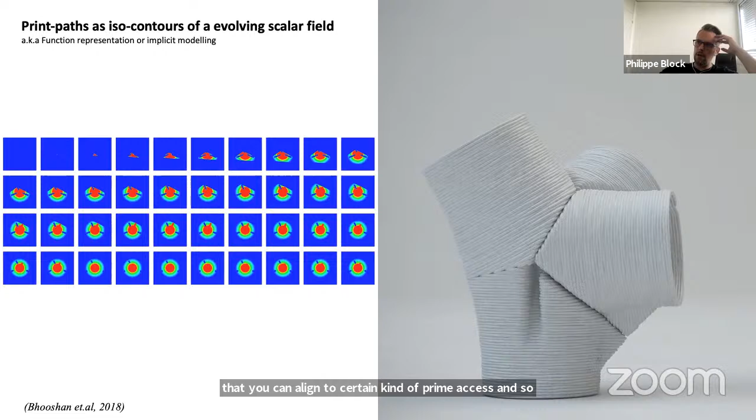So it's very much that the graphs represent the main directions, and then these morphing kind of bitmaps allow you to also deal with non-continuous topologies in the geometries, which is very important to have a very smooth evolution of, for example, the infill in your elements, but which then also allows you to generate these elements that were, by the way, printed in one go by changing direction with the robotic 3D printing.

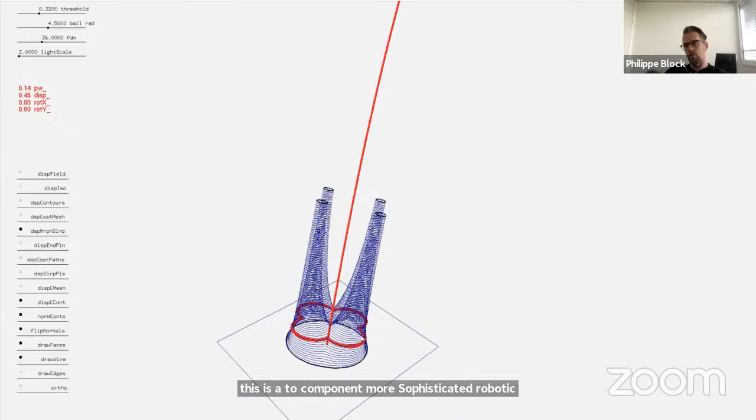Here's an example of what I said, with very different morphing topologies that are being projected along non-straight kind of elements. So this is, we're not talking about the typical extrusion-based 3D printing that everyone is doing today, but this is a two-component, more sophisticated robotic printing that allows us also to have this more controlled kind of evolution of profiles and so on.

Why I'm showing a little bit of background of Shajay's research is because this is, of course, one of the fundamental stones together with our research on masonry mechanics, the research of Alessandro, for example. We brought all of this together to make a bridge, a 3D printed bridge without reinforcement, dry assembled and so on, for the city of Venice.

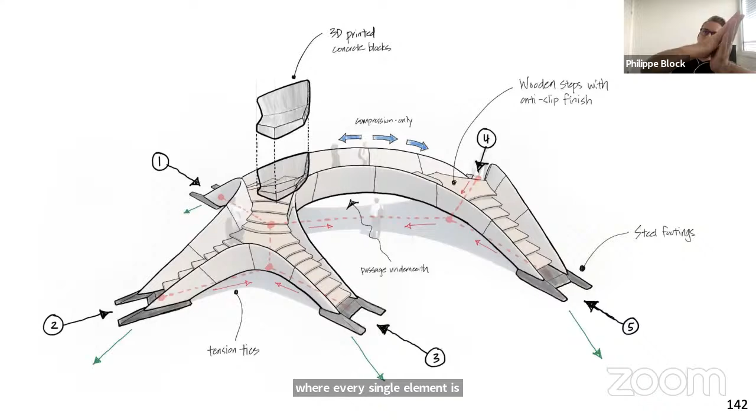So these are, of course, the important references. The armadillo was important. The advances in concrete 3D printing is important. And so we decided: can we make a 3D printed masonry bridge, unreinforced masonry, where every single element is 3D printed with the print paths and the layers aligned to the dominant force flow.

So this was the teaser video that we sent out a couple of weeks ago, because due to all kinds of issues that we have encountered, we didn't, unfortunately, make the opening of the Biennale. But this project is too important to us to make shortcuts. So we decided to take it forward, however it needed to go forward.

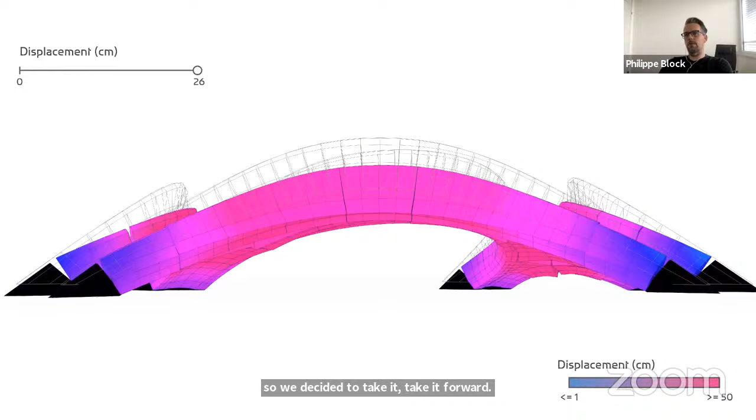And so we developed the entire pipeline. We really want to demonstrate that such an integrated computational design approach allows you to offer, in a way, an absolutely new language for concrete - a concrete that is very precisely placed, that is fabrication aligned, that is structurally informed, that is unreinforced, so that it can be easily recycled, that can be taken apart, so that it can be reinstalled somewhere else.

So this is a collaboration between ETH, my research group, and Zaha Hadid Architects. Let's quickly go back to here. A very important partner is Incremental 3D, an amazing 3D printing boutique startup out of Innsbruck, and then with the large support of Holcim, who also provided a unique two-component print.

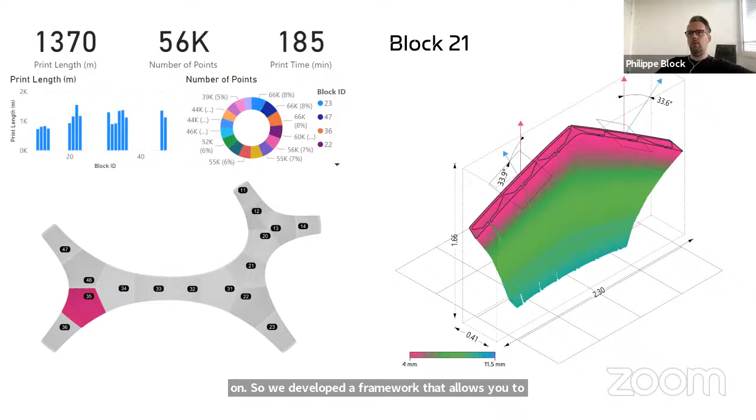So here's some more hints of what's going on. We developed a framework that allowed us to basically iterate and optimize all these different competing parameters: print path length, when do you reprint on the same elements, how do you very smoothly morph, what is the allowed overhang, what is the weight of the component, how to install it. All of this is encoded into the computational pipeline.

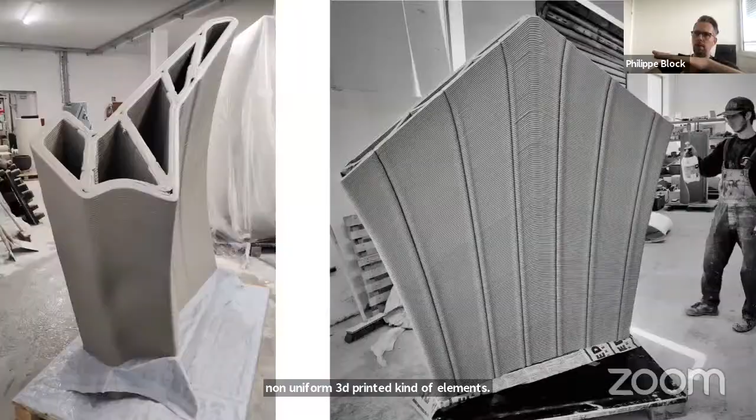So here are a few glimpses. Again, I'm actually not allowed to show this because it's not open yet, but for this audience, I thought I had to share a few images. It's very important to have very good footings, because otherwise you cannot do this as an unreinforced masonry. So we have steel footings, reusable footings that are connected with tension ties.

This is always cool in Venice, that everything needs to arrive in these barges. So all these components arrived, we attached the tension ties, and then this large span...

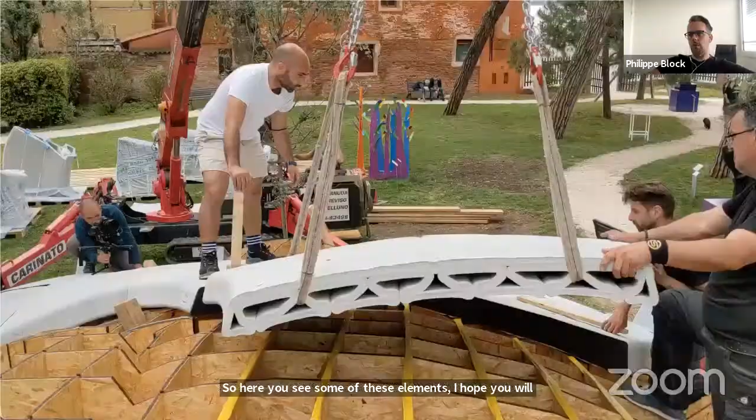From corner to corner, which is the effective large span, we have over 20 meters of span. So here you see some of these elements. I hope you will be able to visit, because the quality of the concrete print is just absolutely ridiculous. I cannot believe, sometimes you think you're looking at aluminum, it's so neatly made, all these little layers.

So you see this also here during construction. Beautiful alignment to the force flow. I'm clicking a bit fast because I'm giving you a scoop, I will not show you the final structure. But the key thing we wanted to address here is that we believe you will hit new efficiencies of using concrete, new sustainability targets, if you adopt a new language for concrete.

So this Striatus bridge is dry assembled. That means you can take it apart, you can reuse all components. It is fully unreinforced, which is important, together with all materials being entirely separated. We don't mix materials, we don't embed reinforcement, we don't glue things, we don't add additional things that could pollute the material. So the combination of fully unreinforced and separated materials makes it low energy recyclable, which is a big advantage of concrete, that you don't lose quality when you recycle.

Low stresses means that now the ink is maybe still a little bit on the polluting side, but because of the low stresses, we are giving the challenge to material scientists to actually go for printable materials that have low impact, like you saw Benjamin Dillenburger doing with Guillaume Habert, directly 3D printing of construction waste.

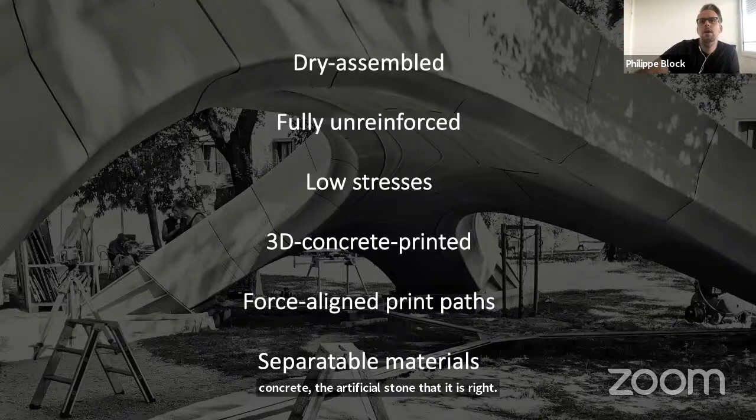So here, another sneak preview in the back. It will be opened the 19th of July. Go check it out, I couldn't believe my eyes when I saw it, the finishes. I hope you will enjoy it as well.

But as in all our work, we are not doing anything new, we're just reintroducing common sense. This is maybe the historical Striatus. You see that these masons, of course, placed the bricks where they needed to be. So the notion that we would just have a layered kind of section, the master builders of the past would be making fun of us, they would not understand what we're doing. This is what we want to demonstrate with this project.

As a last call, I want to say it's important that we work together, that we share our innovations and so on. So maybe have a look at Compass, because on Compass we are sharing all our algorithms, all our methods, for you to try, to reuse, and to do what we do.

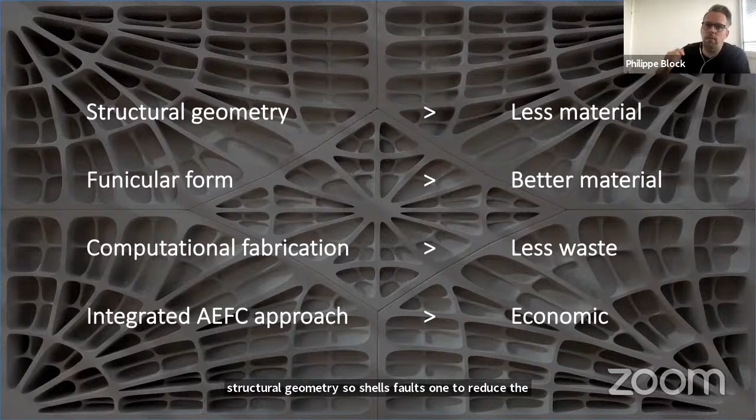So I talked about structural geometry, shells, vaults, and so on, to reduce the volume. I emphasized multiple times that is not enough, it's not just about the volume of materials. We need to use lesser polluting materials, and that will only work when the stresses in the material are reduced, and that is where we activate compression form, funicular form. Through computational fabrication, the emphasis is on not just using machines, but actually understanding the opportunities, the limitations, and the challenges of machines.

That allows us to really reduce the waste. But all of this needs to come together, and we are being challenged by very efficient systems that have been optimized for decades. When it comes to cost, for example, flat floor plates with simple reusable formworks are so efficient that we need to find a way to challenge the economics of all our innovations. And I'm convinced you can only do that by having an approach that considers all relevant aspects.

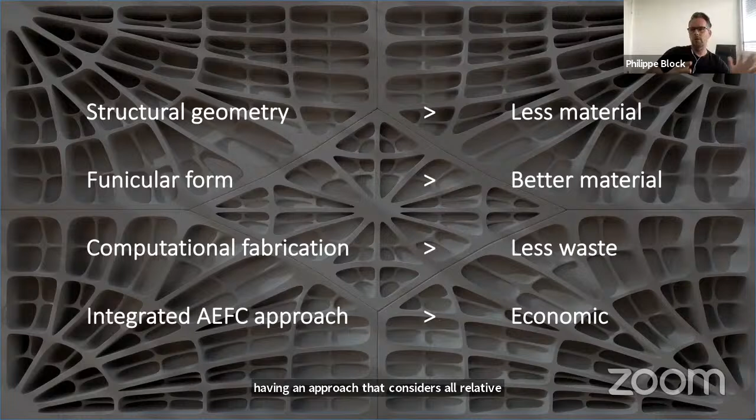Not just design and engineering, but also mechanical systems, how it's fabricated, and how you install all of this on site. By taking all of this into account, I really believe we can challenge the cost of these elements. That's exactly what we're doing in the project I showed in Brussels, where we're using these floors in a real high rise. We're actually at the same cost level as a hollow core optimized prefabricated system.

So this is what we need to achieve, but we can only do this by working together, and we believe an effective way to work together is to use computation. With that, I hope I gave you a lot of material to open the floor for discussion, for questions, for anything that's not clear or needs clarification. Thanks a lot for your attention, and again, Philippe, Neil, thanks for this invitation. Thank you so much.

Really mind-blowing, especially the last project. It's really high quality 3D concrete printing, a 100% compression-only concrete bridge with no dug foundation, just placed on the ground. That's impressive. The quality is very high, and if you've done robotic fabrication before, you know the details really matter. The concrete printing is really difficult because of the material, which is hard to control for quality and stability since you print for a long time. Print quality is always a big challenge for different research teams and companies. We can see the European style of doing very high quality technology, because it's like a global competition in concrete printing—I think more than 100 teams right now are doing that work, but this one is really, really impressive.